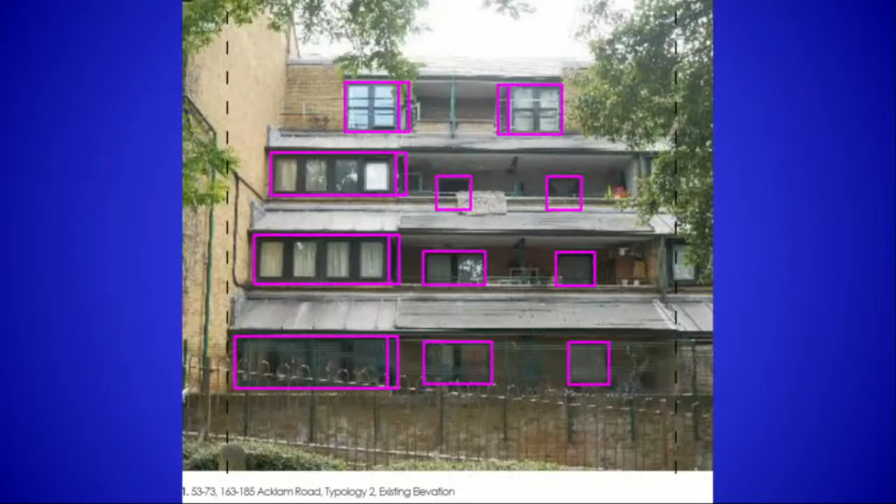So there is a wide variety of window sizes and window types and indeed window colours. And it's proposed basically to keep the same window format so that the size of the windows, the window openings wouldn't be changed and the colours wouldn't be changed either. So they'd be replacing one colour with a colour to match. And so these are just examples, as I say, it would take a long time to go through every block and every window. So that's a closer up image of an existing window, just one of them.

And really that's all I can show in presentation. I think the important thing to draw to your attention, apart from the text of the report, is condition number 3, whereby although we know roughly what the window format would be, condition 3 is actually reserving the larger scale detail of the windows, so that 1 to 10 details of the windows would need to be drawn up and submitted for approval. Because at the moment we just don't have quite that level of detail. But subject to those conditions, the recommendation is to grant planning permission.

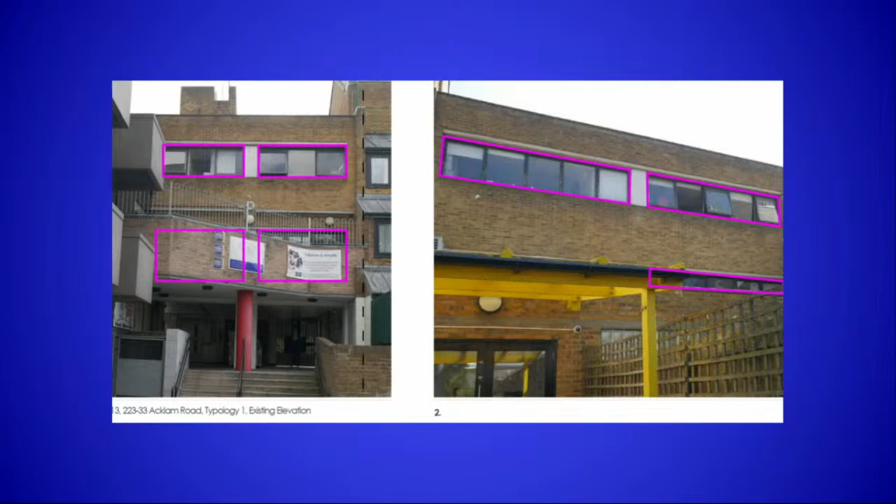3 doors down, they just replaced wood with UPVC. UPVC, because it's weaker, has to be much thicker. This morning, I measured the exact dimensions of the glazing.

My question is to you. If there is still a consultation on the windows being demised as part of the leaseholders, I don't understand - if you were granted tonight, for instance, will you carry on despite the fact that it's still under consultation and hasn't been reached? Yes, it's still in consultation.

I have myself wrote most of that document, which has been sent to Doug and various people to consider. At the moment, we are the landlord and we are responsible for the windows. There is also, if you do demise windows, having spoken to some colleagues in Islington, some additional cost that comes with that. Obviously, you need to change the lease, so there's costs that comes into play.

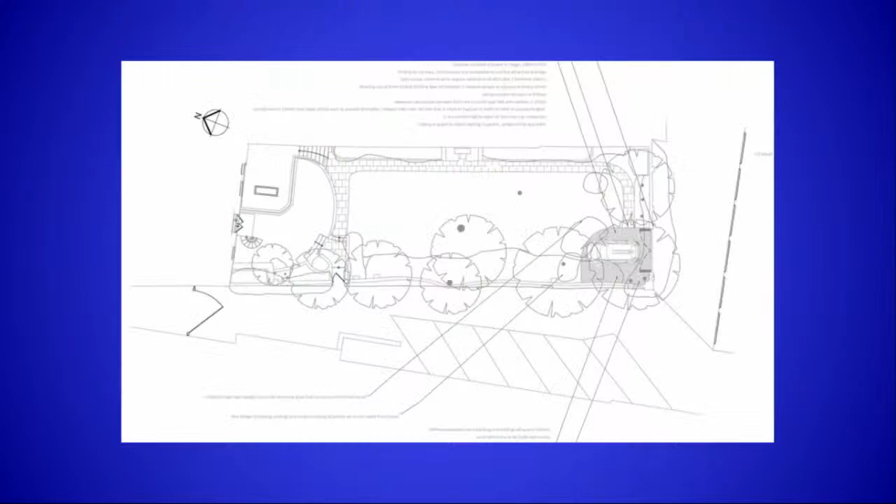And in fact, the same condition is on the planning permission as recommended as well.

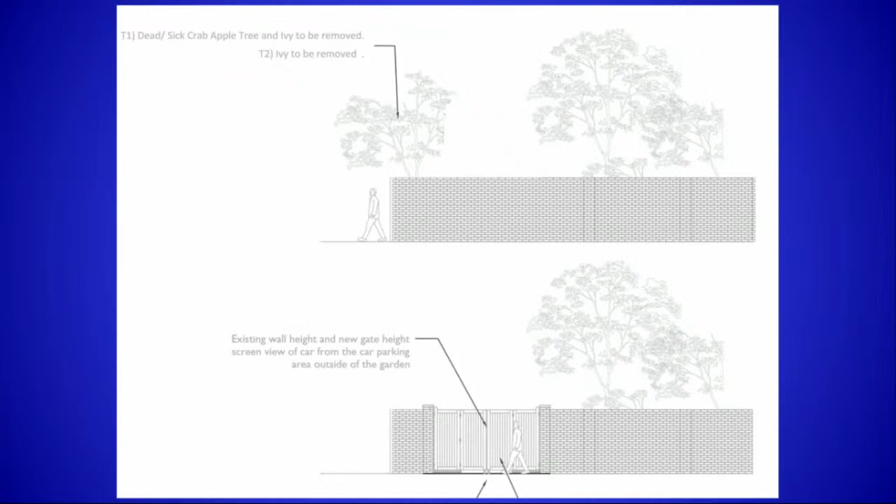Okay, very good. Well, I think we need to make a decision about this. I think personally these issues about access are actually rather separate from the planning decision. It may be that the details of access mean that a planning permission might be granted for something which can't actually be constructed and accessed. I think the proposal itself is for a space for one vehicle, and although access is quite tight, it's important to remember this is quite tucked away at the back of a very large garden by Kensington standards. It's not something that would be seen from public views, really. So on that basis, personally I think it's probably on balance acceptable.

But I think we should have a vote. The recommendation for the planning permission is to grant as set out in the report with the conditions. Can I see those in favour of granting, please? Those against? Okay, so that's 2 in favour, 2 against. I will use my casting vote in favour of the proposal, so planning permission is granted.

If I can now move on to the listed building consent, because it is a listed building, can I see those in favour of granting listed building consent, please? Those against? So that again is 2 in favour, 2 against, and I wish to use my casting vote in favour of granting listed building consent. So that is granted as well.

I've included this section here as I think it best shows the new building line, so you can see the infill on the right-hand side. It wouldn't extend beyond the established rear building line of the property. You can also see the new conservatory structure and how deep it is, as it fills an existing terrace area. Just quickly, here's the existing floor plan.

Just to get your bearings, here's the balcony area where the conservatory would be located, and this area here with the doors out onto the flat roof is where the infill would be. So there's the proposed drawing for you to consider.

create overlooking in what is at present a blank section of wall. The French window has no material purpose. If this French window is allowed, it will have a negative impact on the privacy of Flat 2, 12A's living room and Flat 3. We urge you not to permit this.

The application for the terrace infill proposes 2 sets of French windows in the proposed ensuite bathroom. This will create a new overlooking if allowed. The French windows face habitable rooms in Chalfont House opposite.

Residents are concerned that the rear elevation drawings are not accurately scaled, that the proposed infill of the existing balcony and existing terrace will be far larger than is shown on the drawings. If councillors are not minded to refuse the infill application, we would respectfully request that the application is deferred for 3D images to be provided to officers by the applicant.

Officers in their deliberation haven't sufficiently considered the negative impact of these two infills on the quiet enjoyment of our homes. If permitted, this development will allow direct overlooking of my balcony, that of flat 3, and directly into the living room of flat 12A, whose roof is all glass.

New direct lines of sight will result from the proposed new balcony infill on both its side elevations, impacting privacy. Despite what officers have said in paragraph 6.4 and 6.5 of the report, we still believe that this development will lead to an unacceptable increase in the bulk and mass of the building, which will neither preserve nor enhance the conservation area of the building itself.

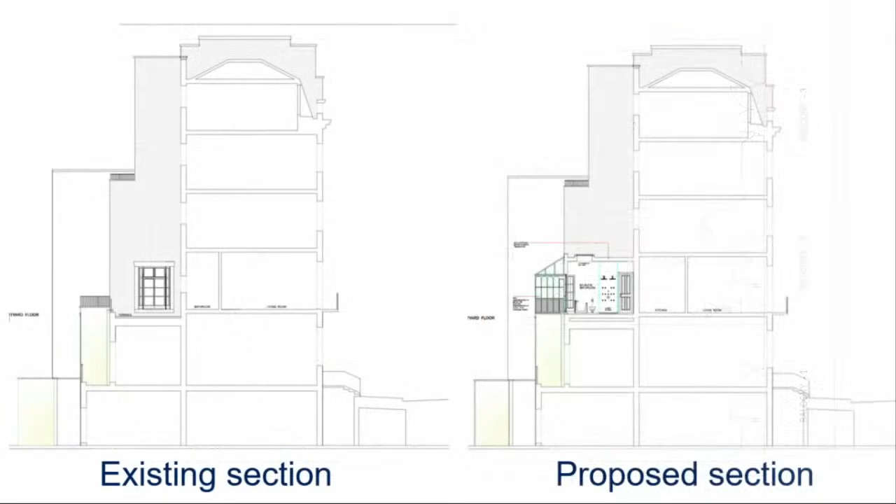With regards to daylight and sunlight, the proposal, as with the existing properties, they're all west-facing. There is no overshadowing because the sun rises in the east and sets in the west, and therefore there would be no overshadowing from the conservatory, which is west-facing. Thus, there would be no loss of daylight, outlook, or sense of enclosure to any other neighbouring properties that would cause concern. Overall, the infill extension and conservatory has an acceptable impact on the living conditions of the neighbouring residents. Good living conditions would continue to be secured.

I should point out that the approved proposal for the neighbouring properties for flat 6, 13 to 15 Chesham Street was subject to a landlord's and managing agent's license to alter works, which has been approved by the objector sitting in this room, as well as full plans building control application, which were granted in full and addressed areas such as rainwater and soil waste drainage. A license to alter works and full plans building control application would also address the identical works for the current proposal. Thank you.

Flat 2, where I live, is directly below the infill of the terrace, and the balcony is directly above us. So this is all directly above me. But I'm on the ground floor, so I'm at the bottom of a tunnel, basically. I've got walls very high above me, six floors above me.

So I'm at the bottom of this tunnel, basically. And my neighbour, who is in the basement, that's flat 12A, has a completely flat glass roof. Officers have photographs of this. So these French windows, which lead onto a bathroom, two sets of French windows in a bathroom, which would be the infill, would become a bathroom of the terrace. That directly overlooks me, but it also overlooks this glass roof, which is a living room.

And then there is the new French window in this blank wall, which has never existed before, and that window serves no particular purpose because there's already going to be another French doors from the master bedroom.

We also are very worried about the scale of this, as I've said, and the drawings. And we do ask for 3D images to be provided to the officers by the applicant, because we think that this is quite deceiving.

And just one more, if I may. So the existing balcony, which is above you, yeah? Yes, the flat roof. The flat roof which is above you. And the balcony, which are above you, okay, I understand. Yeah, it is a bit confusing. So presumably that is demised to them, but that's another matter. So that is directly above your flat?

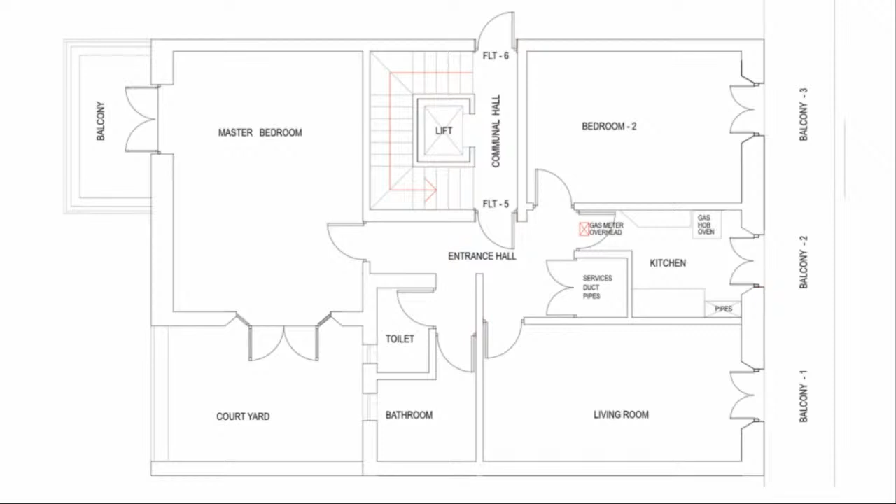Chair, I have sympathies with property owners who want to maximize the value of their property and make the most of it and enjoy it. But I also feel we need to be mindful about our neighbours and the people we live with, and we can't let one trump the other. And I get the feeling this is a very, very small space, and we're putting so much into it, and whether it makes sense.

Okay, anybody else? Emma? Yes, I'm absolutely with Councillor Idris. I just think it's too much. A lot of these properties where they have flats, everybody lives on top of each other and overlooks each other, and I think it's a step too far, and I think it's unneighbourly and unnecessary. Okay, Tom, sure.

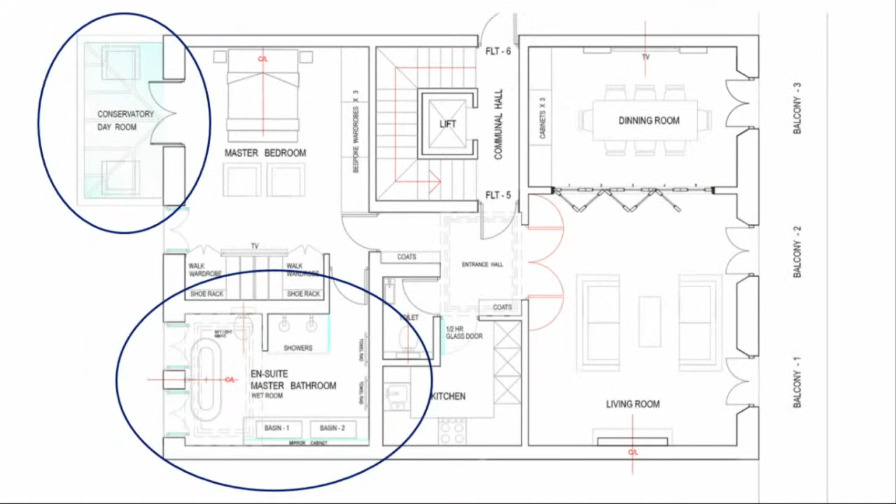I don't have much more to add. It is, as Ms. Lyle said, a slightly tricky one to get your head around based on the drawings and everything provided, and therefore to picture the exact nature of the overlooking. So I don't have a huge amount more to add.

Okay, well, in that case, I think we should move to a vote. So the recommendation is to grant permission. Can I see those in favour of granting, please? Can I see those against? Okay, so the recommendation is not adopted.

So we have to discuss a reason for refusal. I don't know, Tom, do you want to kick off on that? Well, for me, the concerns around sense of enclosure and overlooking, I felt perhaps, as the objector said, with more images that could have been overcome, but based on what's in front of us, to my mind, couldn't overcome the concerns on sense of enclosure and overlooking.

Okay, so that would be, I'm looking now at officers, so that would be CL5, neighbouring amenity of neighbouring properties, wouldn't it? Yes, that would be the relevant policy, which talks about ensuring good living conditions for neighbouring occupiers. I just would wonder if we could clarify from members whether it's both elements, so it's the conservatory and the infill and associated French doors, so it's sort of a blanket concern, or whether it's one of those two particular elements. A lot of the discussion's been around the infill, but I just wanted to check whether it's both.

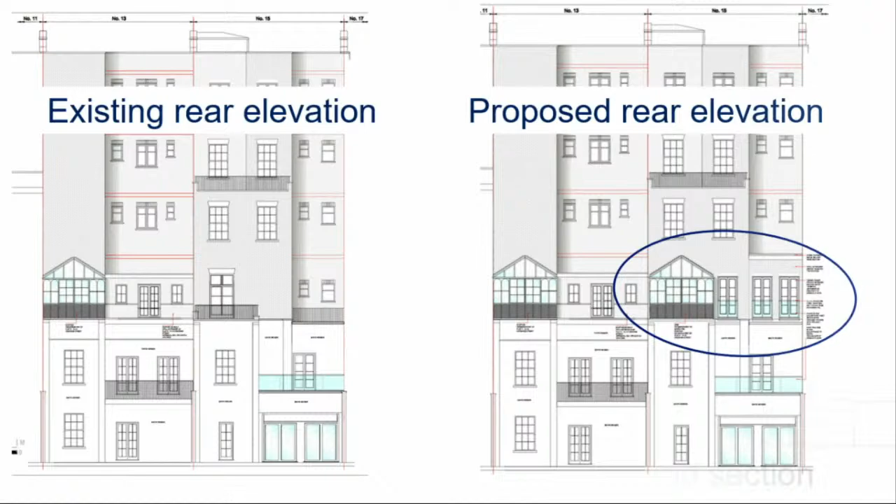If we can now move to consider the application at Penywern Road, please. And I think that's Katie Harrell again. Thank you, Chairman. Just a few images to show you.

So the application site is the hotel located at 11 to 13. You'll see in the existing rear elevation at the moment, the property benefits from 2 rear closet wings with existing terraces. Under the proposals, these would be extended upwards. You can see in the right-hand image there the new built form at the fourth floor level it would be. Just to note, although the images show the new extensions to be white rendered, we have recommended a condition that would require them to be built in brick to match the finish of the rest of the property.

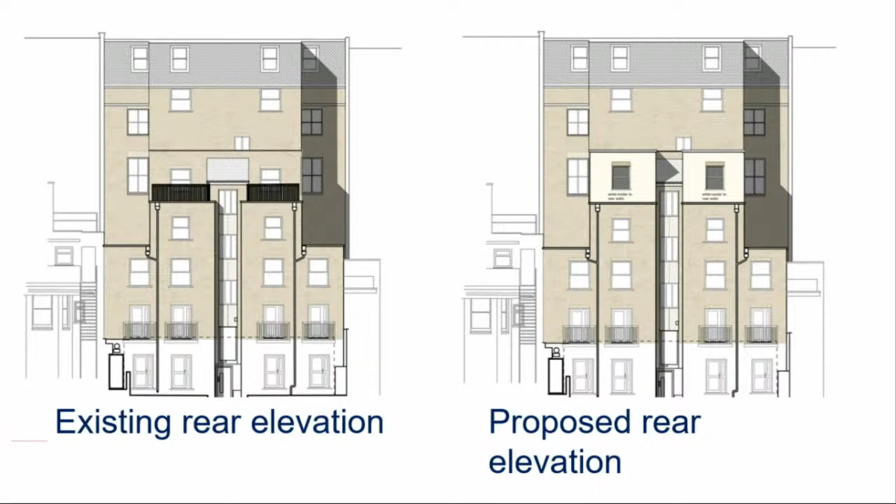Thank you very much. Now, there are no speakers for this application. Can I just clarify something for my benefit? This application is part of a remodelling of this hotel. So it creates some new accommodation, but the total number of hotel rooms actually is reduced because the whole building is being refurbished. Is that correct?

That's right. So although we have a policy that looks to generally resist the loss of hotel rooms, the policy goes on to talk about supporting development that looks to improve and enhance the hotel facilities. So there's a bit of a balancing up there. In this case, the hotel's being fully refurbished, and as part of that, the extensions are included to allow the rooms that are there to be improved. So there is a slight drop in the overall number of rooms.

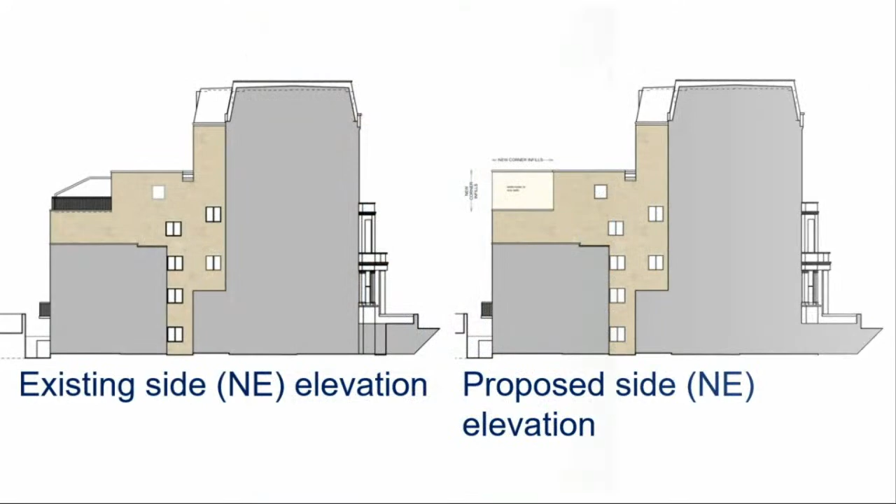Yep, I mean, as hopefully this image shows, we're already talking about a property that has been really heavily extended and extends out further than the neighbouring properties on either side. If you see where my cursor is, on this side and this side, this is where the new built form would be, so not immediately adjoining either of the properties on each side. So we don't feel there would be an increase in sense of enclosure. In terms of overlooking, there's existing roof terraces at these locations, so you might conclude that actually extending upwards and just having windows might actually improve the situation in terms of overlooking.

Thank you very much. Good, thank you. Okay. Well, in that case, I think we can make a decision. So the recommendation is to grant planning permission with the conditions set out in the report. Can I see those in favour, please? Okay, so that is granted. Thank you very much indeed.

If we can now move on to the application relating to Camelford Walk, and I think that's back to Mr. Taylor.

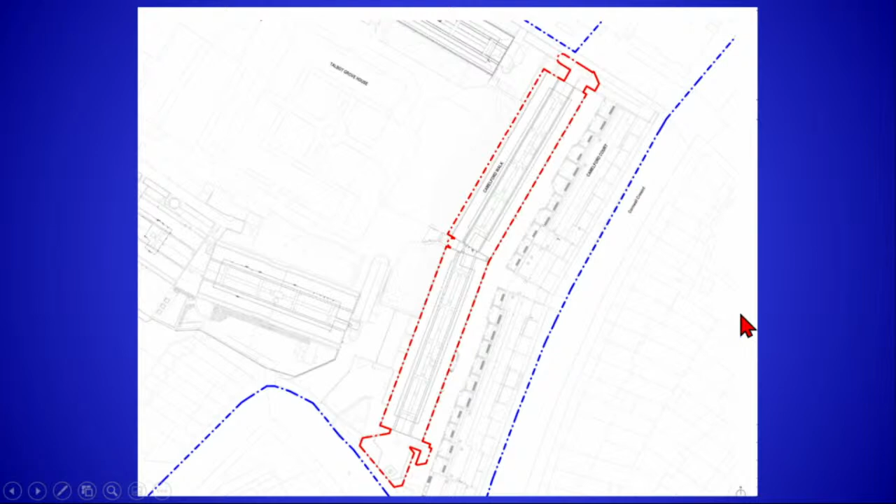Thank you, Chairman. Yes, essentially this is an application for planning permission for roof works to the 2 blocks of Camelford Walk. You can see in the first slide that Camelford Walk is not strictly one long block, there's a division in the middle.

So it divides into the 2 blocks, with 59 flats divided between them. That's a photograph taken from the eastern end, looking along the back side of the block. You can see it's got a flat roof, and that photograph taken on top shows the existing ventilation plant and ductwork on the roof.

That's taken in one direction, but it's consistent all the way along in both directions. That image shows on the left a section through the existing roof with the existing parapet bordering it, and on the right you can see in the proposal how the roof would be thickened with insulation and a parapet raised at the side.

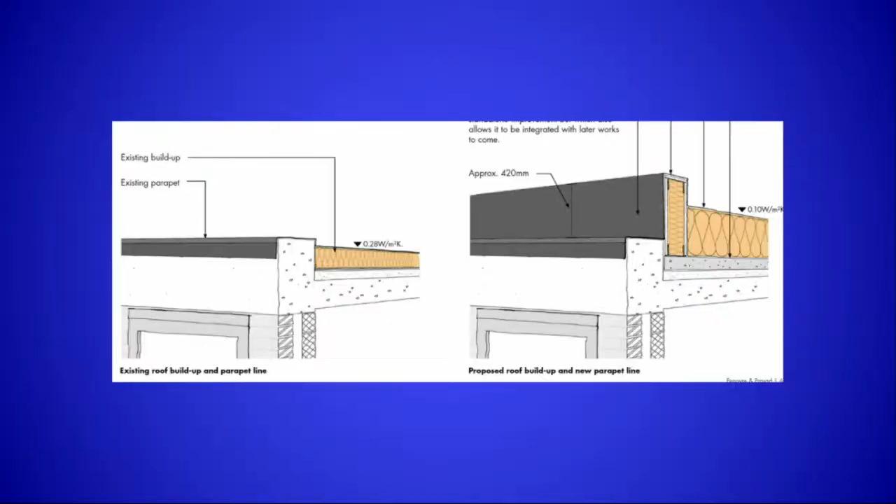As proposed, you can see there's very little change, really. The only difference is that up at roof level there's now a more solid section where the parapet runs around. And that's the last slide, Chairman.

Any questions, Juana? Yeah, thank you, Chair. Will the new elevation be visible from the street, or is it not something...

Well, the elevations aren't strictly facing a street, given how the blocks are located, so you have to walk into the estate to see the whole elevation above you. The most you can see from the streets is one of the end views. So it's not going to be protruding out? No, it won't do. Really, in perspective, there'd be very little change to the appearance of the building.

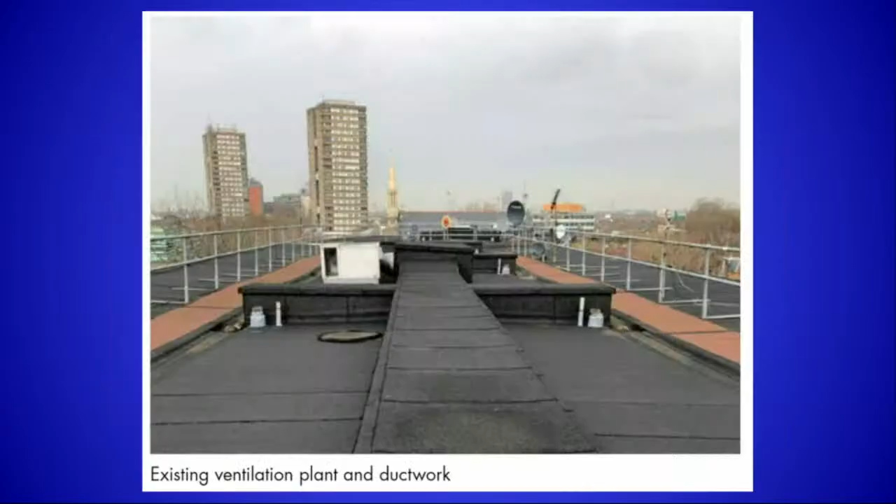Okay. All right. Thank you. Any other points? No. In that case, I think we can move to a vote, as the recommendation is to grant planning permission. Can I see those in favour, please? So that's agreed, that's granted.

Thank you. And now can we move to Henry Dickens Court? And I think, Derek, that's you again. Moving on to Henry Dickens Court, this is the first application in the North Pack, and essentially this is to replace all the existing windows with UPVC windows.

The difference in this case from Swinbrook that we considered earlier was that in this case all the existing windows are UPVC, so this application is replacing UPVC single glazed with UPVC double glazed. You can see in the first slide that Henry Dickens Court comprises quite a number of different blocks - the blue line goes right around the perimeter of all the blocks.

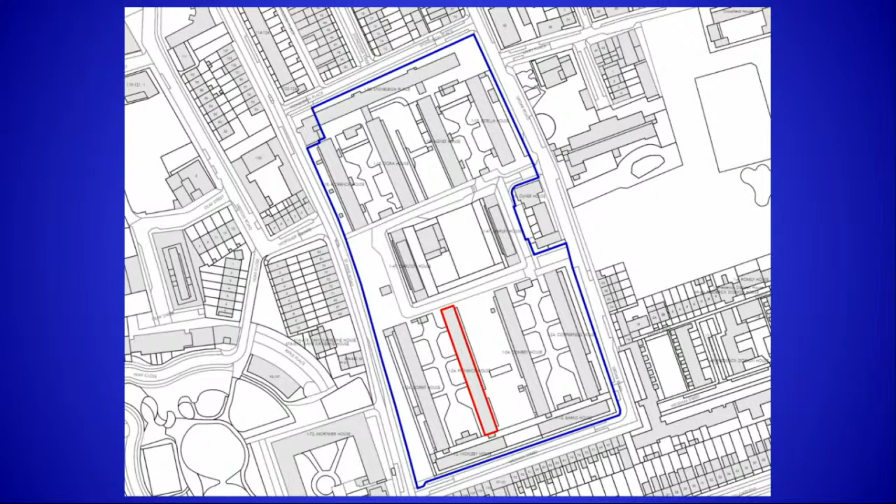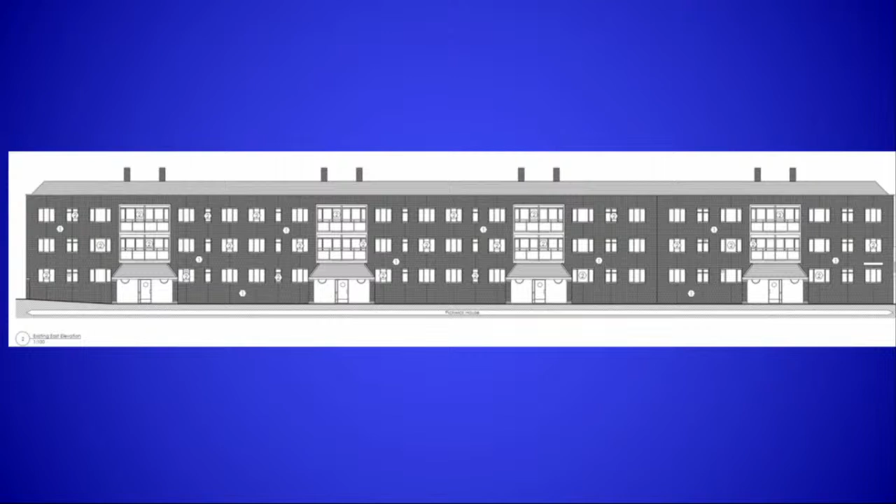I'll show you some slides relating to Pickwick House, which is one of the blocks, which gives a good indication - it's in a larger plan form, so you can see how it relates to the other blocks around it. That's an existing image, and that's a proposed image. At that level of detail or distance, the proposed windows basically replicate the existing ones in terms of their size and glazing pattern.

At a high level of detail, that's Pickwick House, just the central part of the elevation - that's the existing and that's the proposed, basically little change. And that's a proposed window at a higher magnification, 1 to 10. And that's the last slide.

Any questions? I have one question, which is how old are the existing UPVC windows? I'm not sure, actually. The windows in Swinbrook Court were 38 years old, but I can't clearly tell you what these replaced after the original. Yeah, but you don't know how old those were. I don't know.

Okay, I think that's an interesting question, and in another context a very good question, but it's not really a planning matter, I think. Oh, I know that, I just wanted to put it on record - does it actually give a very good idea of what we're facing here? I can actually tell you, it does tell us in paragraph 3.3. Paragraph 3.3 confirms that the windows were inserted when the estate was modernised in the 1970s.

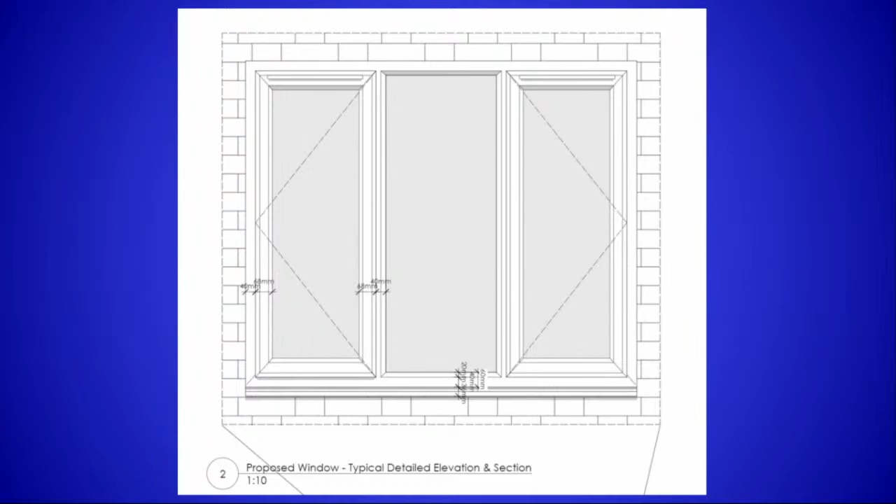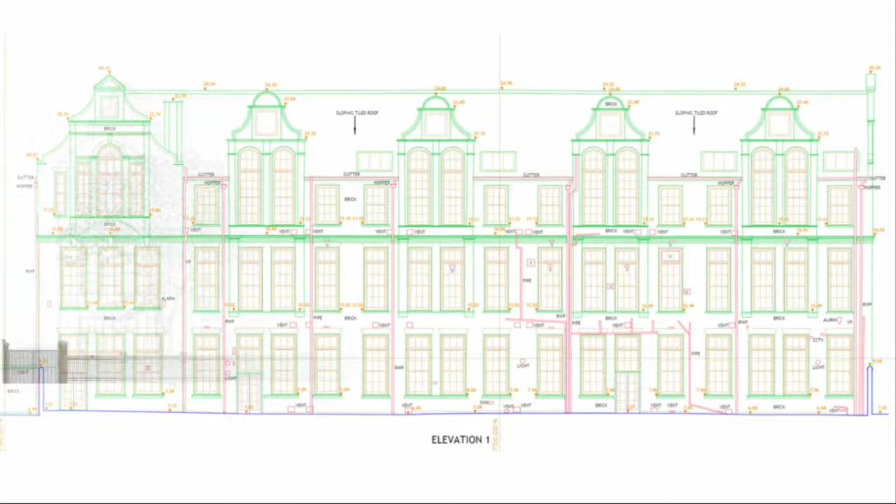Thank you very much. So we have a pair of applications for you to consider this evening, planning permission and listed building consent. The works are quite simply to replace all the windows on the school. These are currently timber but single glazed, and we're told of varying states of disrepair. I've included an elevational drawing, but I'm not sure it's a huge amount of help. But just to clarify that, yes, all the windows would be replaced, but they would remain timber. They have been scrutinised by our Heritage and Conservation Officer, who is satisfied that on balance they are okay. You'll see we have given weight to the public benefit of improving the thermal efficiency and the conditions within the school for the pupils as well in coming to the recommendation before you. And that's all I have to say really on that one.

No, thank you. Any questions? Councillor Idris: In the report, it says the proposal is to replace the windows of the school with double glazed alternatives would be acceptable. So you're not doing alternative, you're doing like for like. So the frame will remain timber, as is the current situation, but they would have double glazed windows inserted. So the glazing bars would get slightly thicker. So they're not quite like to like, but they're as close as can be achieved. Okay, all right. Thank you.

Okay, thank you. This is listed, so first of all, we need to consider the planning permission. Can I see those in favour of the recommendation to grant, please? So planning permission is granted. And if I can now see the recommendation for listed building consent, the recommendation is that we grant listed building consent. Can I see those in favour, please? So that is agreed as well. Thank you.

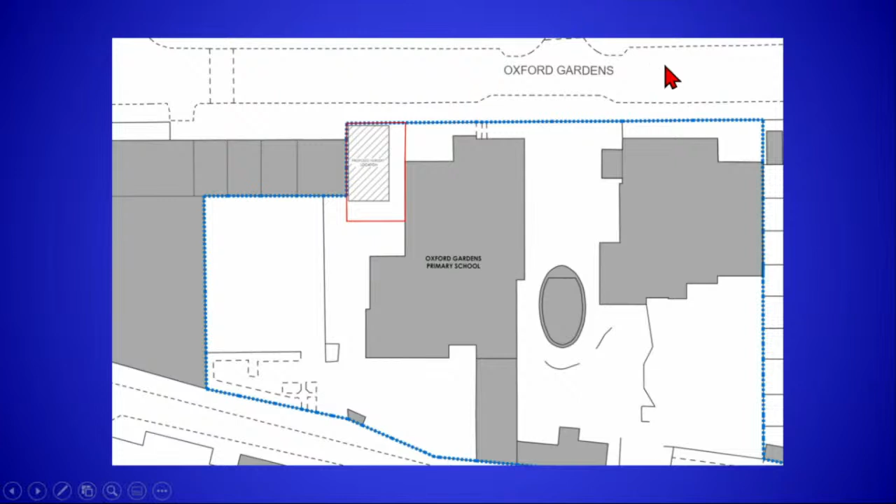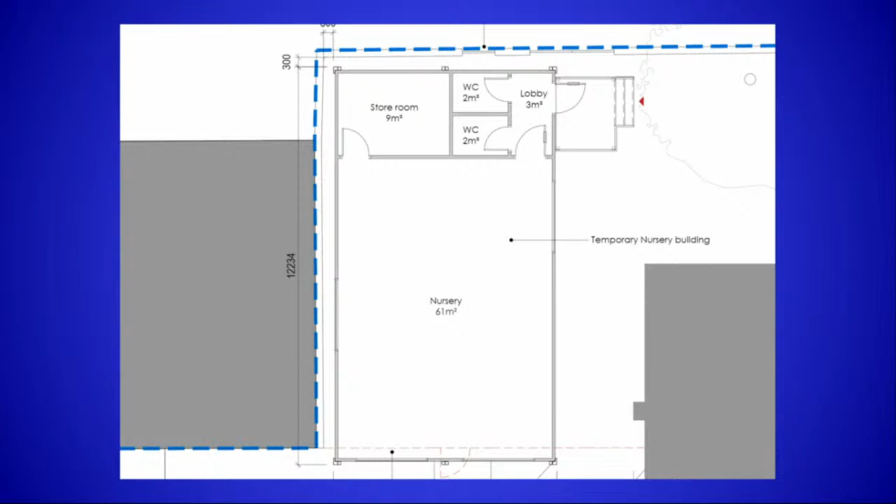Okay, thank you. Any questions? Really, Chair, I forgot to mention that I am a school governor for Oxford Gardens, and it slipped my mind to declare it earlier, but I don't have any questions. That's it, just declare it. I think, Councillor Idris, you would have to recuse yourself and step out of the room for the vote. I think you would have to recuse yourself for this matter and step outside of the room. Yeah. So if you just step outside. Yeah, that's it.